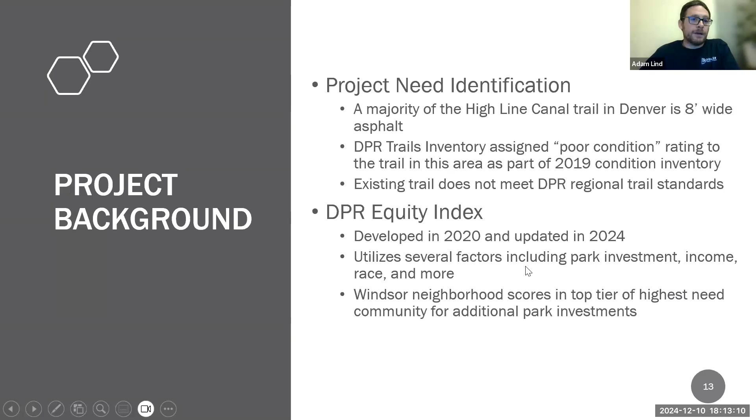Additionally, DPR developed an equity index in 2020 and has been updating it every 2 years. And this utilizes several factors, including park investment, income, and other socioeconomic factors to kind of rate every neighborhood in Denver. And Windsor neighborhood scores in the top tier as the highest need for additional park investments.

So just to familiarize everybody with our limits, if you're not familiar, on the west side is the Parker and Mississippi intersection. If you're a trail user, that's where the new underpass was recently completed. And then on the east side is Havana Street, which is also the border with Aurora.

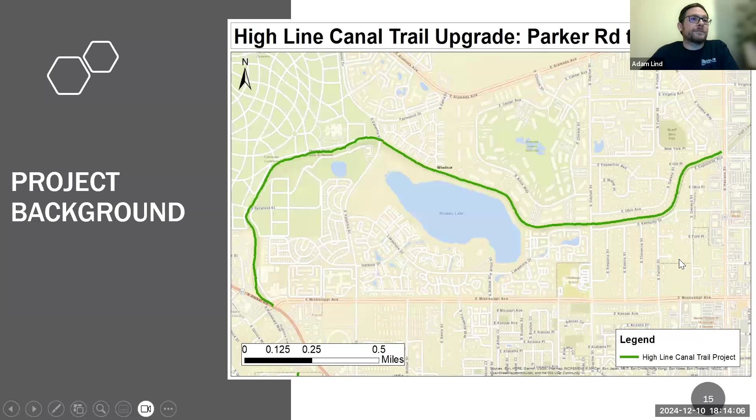So for this project, we've got $4 million for design and construction, a little bit more than a 50-50 split with the High Line Canal Conservancy, 1.7 million coming from them, which also includes funding from a GoCo grant that they recently got, if you heard that in the news, and then 2.3 million from Denver Parks and Rec, between CIP and expansion funds.

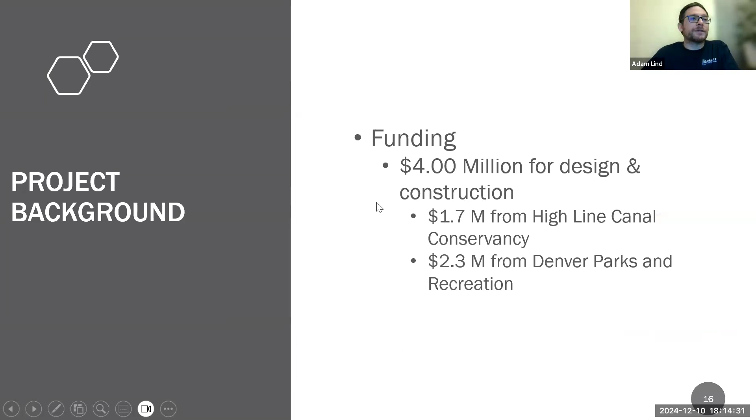So to talk about those proposed improvements, again, here on the left is the existing condition, and on the right is our regional trail standard. So that is a 12-foot concrete trail with an adjacent 4-foot crusher fine trail, and then recoverable shoulders so that you're not kind of just stepping off into a steep slope.

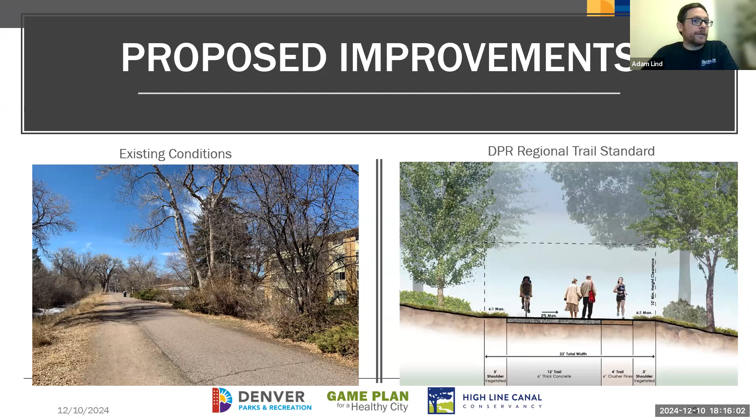So this was developed as part of Denver Moves Peds and Trails, which is a city adopted plan. So this is kind of what we're doing on our regional trails, which is the High Line, Sand Creek, Bear Creek, Cherry Creek, and South Platte. They all kind of are planned to meet this regional trail standard.

However, the High Line Canal plan had a little bit of a different recommendation. And this is looking corridor wide. So even in less developed areas or less populated areas, an 8 to 10 foot hard surface trail with a 6 to 8 foot soft surface trail.

And so working with the Conservancy and their needs and what they've heard from the community, we've come up with a hybrid trail cross section that keeps 12 feet of concrete for ADA compliance and use, and also to give additional space for people biking to pass and not have to pass so closely, but also includes that 6-foot crusher fine trail for that natural environment that everybody enjoys.

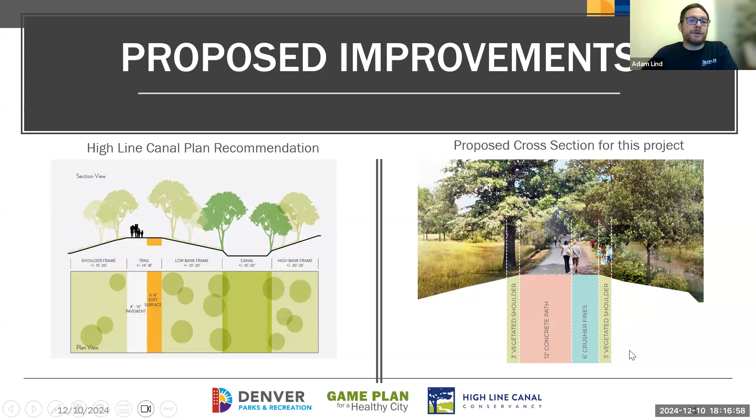So this is our typical that we're kind of aiming for, and we'll talk about some examples where we just don't have this much space and how we made some decisions around that. So again, this picture on the left is the existing conditions, and on the right would be what we would do ideally. So we'd have a really wide concrete trail, that 6-foot crusher fines trail, and some shoulders.

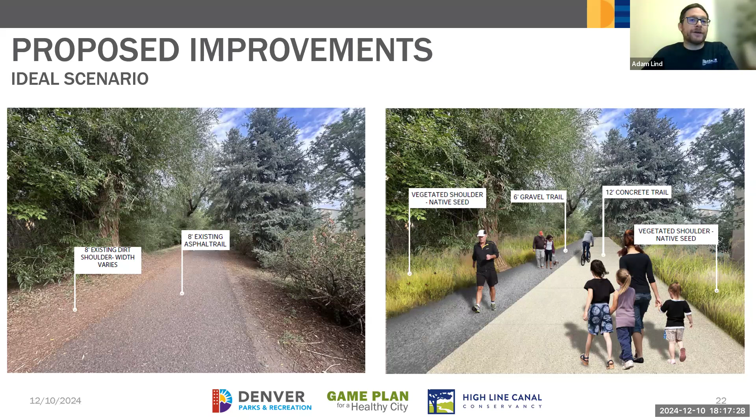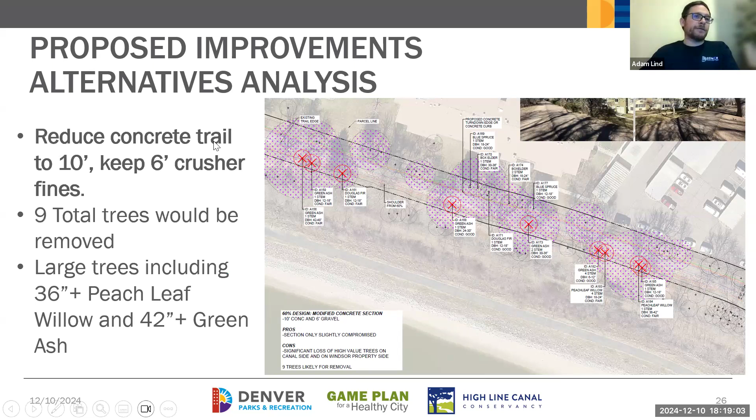So the next iteration we did was, all right, well, let's narrow that concrete trail to 10 feet and keep the 6-foot crusher fines. But even by doing that, we would still be removing 9 trees. So save 1 tree, and both of those large trees have to come out.

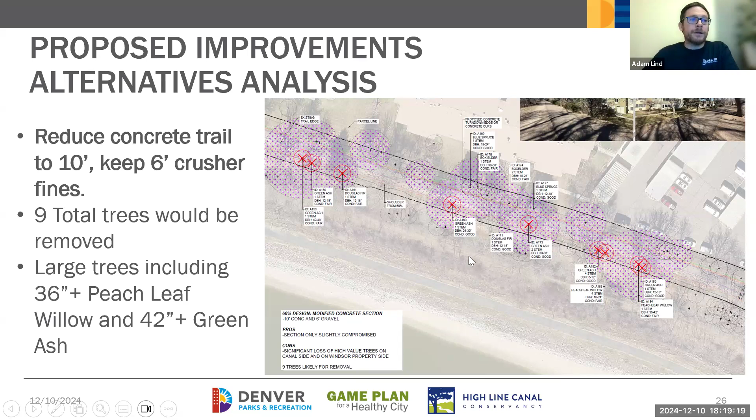So the next iteration was, okay, let's keep the concrete trail at 12 feet, because going back at some point in the future and adding 2 feet of concrete is not really a realistic solution and would be more impactful, and just reducing, and in this case actually eliminating, the crusher fines trail through this section.

So by doing that, keeping the 12-foot concrete trail, it's ADA compliant, the most space for people biking to be able to use the path and get around people walking safely and not have to be so close together. We actually don't need to remove any trees in this section. So, for us, that seems like the most logical option. Over time, as trees die or need to be removed, we can go back and much more easily add in a crusher fine section than we could a concrete section.

So this was a little bit of the decision-making process, how the sausage is made through this project. And there were a few areas where we were really trying to avoid removing any large trees and sometimes had to sacrifice a little bit of crusher fine width, a little bit of concrete trail. So it's not just one straight cross-section throughout the entire project.

So how does this look if you're not? Adam, before we proceed, just a point of clarification. Crusher fine is something that you mentioned several times. What exactly is crusher fine? What type of material is it? That way people are very much aware. Yeah, sure. So it's a soft surface gravel path. So not paved, unpaved, soft surface for walking, running.

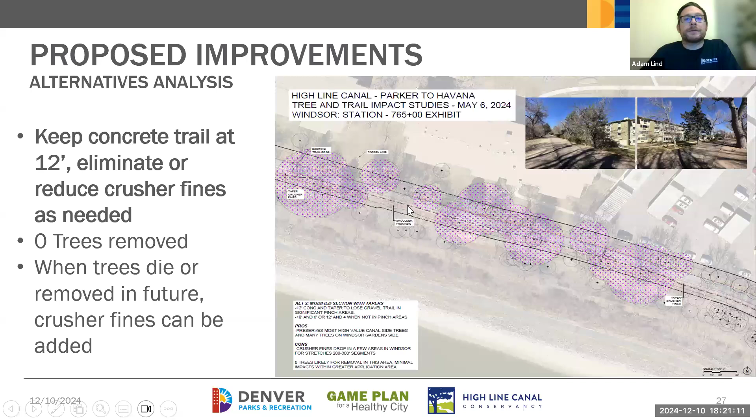Thanks, Jesus. So this is kind of what that looks like in the real world if you're a visual learner and not so much into reading engineering plans. As this gravel path approaches a large tree, it'll kind of neck down, and then we'll start back up once we have clearance out of that tree zone. So there will be a little bit of pinching, but we'll make sure that happens before that pinch point so that you'll have time to stop and look over your shoulder and really make that decision before the trail gets a little bit narrower through here.

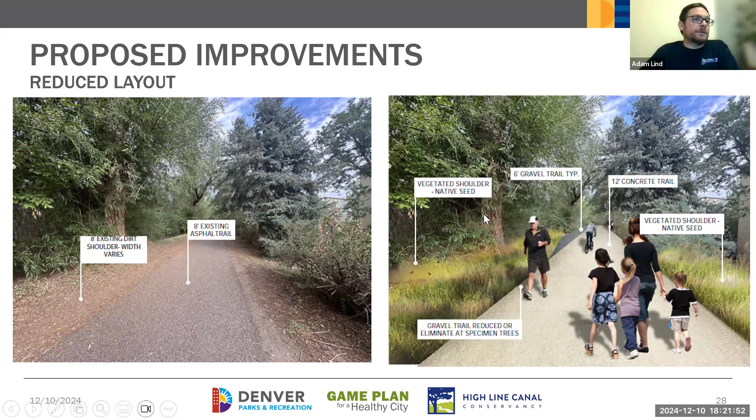So again, a similar graphic for this example. You've got the 12-foot concrete trail and the 6-foot gravel path. Starting here, as we get closer, here's your really large tree that we're trying to preserve. That gravel path will start to taper, and additionally, we're bending out the concrete trail and shrinking it a little bit so that we're pushing away from the trunk of that large tree, giving those roots some more room to breathe. And then as we pass that tree, we'll pick up the gravel trail and start widening that back out.

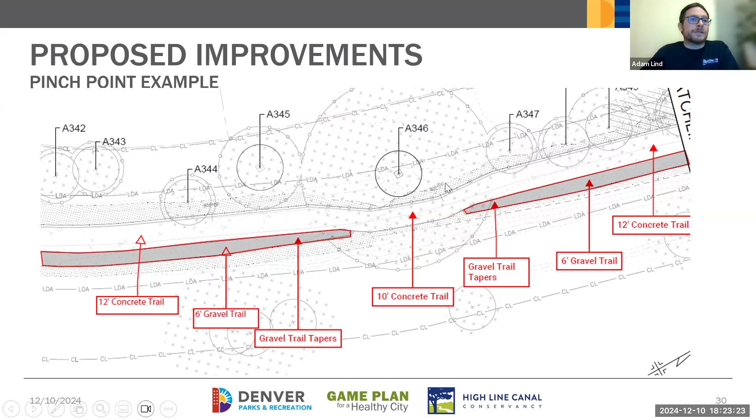So this is, I think, another good visualization of how we're able to get as much of the section in as we can, but sometimes we have to make those changes to that cross section to help preserve large trees, which we think have larger value and benefit for the ecosystem and for people experiencing the trail. We really want to keep that nature in the city vibe that the High Line Canal brings.

Something else that's really new and cool for this project. There's obviously a ton of existing trees along the High Line Canal, but we haven't done any new tree plantings, so that's something that we are going to do here. This is Valencia Street. In addition, we're planning to add new irrigation to water new trees. We know the large trees are going to slowly die over time. We want to start to bring back a new forest canopy through this area to continue to provide shade and a good experience for people using the trails.

So with the tree plantings, we're also looking at kind of making this an amenity zone, an amenity corridor. So we've got some bike racks, picnic tables. We'll have a drinking fountain station.

I'm from North Carolina, and I always say water fountain, and people are like, why are you going to have a big fountain shooting water out? But I mean drinking station.

So something that looks like this here. We'll have some boulder seating as well, stump seating for that more natural feel, but also your typical bench seating. And that'll be interspersed for a few thousand feet west of Valencia. So we're really excited about this. This is something new for the High Line that we're doing in this area, and really trying to add these

amenities that people want. We all know it's getting hotter, and with trees kind of that shade factor going down, we want to be able to provide new shade, water, amenities, rest places that people can enjoy the area, whether you're biking 20 miles or just walking a half a mile. And additionally, as we mentioned earlier on, signage will be added at all these intersections to help let you know where you are on the canal. And interpretive signage is another item we're going to add as well.

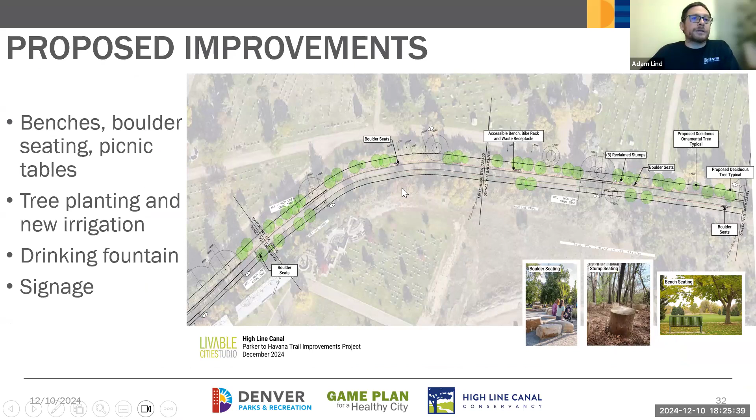So here you can see where this runs along Fairmount Cemetery on the north side. And then we'll run this irrigation and tree planting down through the corridor. So this is something new that should be a good and welcome change for the long-term health and benefit of the canal.

So additionally, all of our trail improvements will be made to meet ADA requirements. All of the crossings will have curb ramps. Since we're widening the trail, we have to widen the curb ramps. The RRFBs, the blinky lights where you can push the button across the street, will be put back and reset. So none of those are going to go away. So really enhancing that corridor and making sure that the trail is comfortable to use for people of all ages and abilities.

So there are going to be some detours with this project. As we hire a construction contractor, we'll work through these details with them, but our initial proposal is that the project will be built in phases. So we'll just call it phase A, from Parker and Mississippi to Valencia Street. The segment of the trail that'll be closed will be pretty much from the underpass ramp to Valencia. It's about 0.8 miles. And so the detour route will use the existing wide sidewalk path on Mississippi.

And then if you're a pedestrian, you can use the sidewalk along Valencia. And if you're a bicyclist, you can use the buffered bike lanes to get through there. And all the detour routes will be signed, and the contractor will be responsible for plowing the streets, the bike lanes, if they're not gotten to by DOTI, and the sidewalks as well. So those won't necessarily fall on the property owners. Those will fall on the contractor during the construction phase because that's part of the detour.

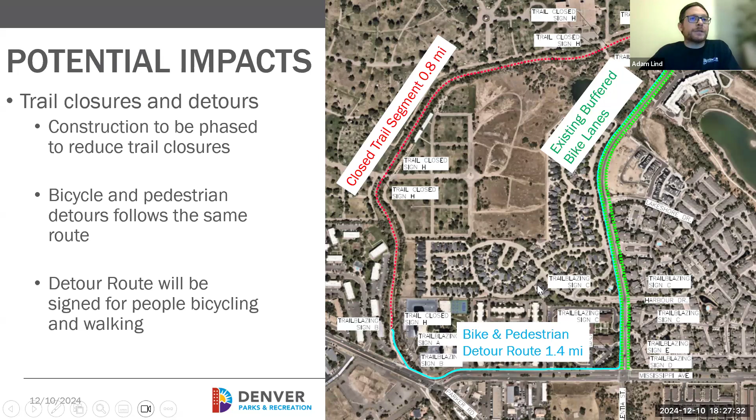the ability to have temporary bike lanes for people biking. If you're walking, you'll be able to use those sidewalks regardless. So we are looking at that and what that feasibility is. So this is a place, again, where the bike route and the pedestrian route are more or less the same. And then the third section is from Dayton to Havana.

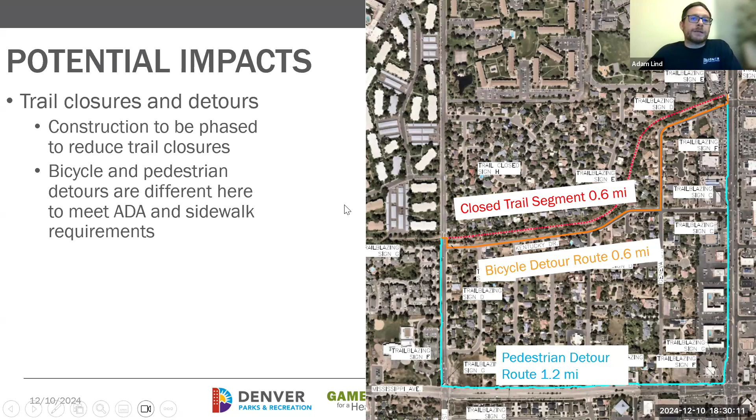Additionally, impacts to trees. As you all are probably familiar, there are a lot of trees adjacent to the trail and in this area. So the city with the High Line Canal Conservancy recently completed a tree risk assessment in July 2022 that helps guide these decisions for tree removal prior to and during the project. The contractor will be responsible for doing handwork around roots and exploratory air spading to locate roots prior to doing construction. And specific additional care will be taken during design and construction to protect these high value trees.

And the forestry department has a pretty strict tree protection zone requirement. So that'll be implemented, and we'll be sure to be on top of that with our contractor. So as of now, this project is proposed to remove 15 trees, with 5 of those being invasive Russian olives that we're more or less required to remove because they're an invasive species.

I do want to note that the High Line Canal Conservancy and Denver Water are also going to be removing more than 20 trees in this same area as part of this risk assessment. So these are high hazard trees that are dead or failing and are prone at any point to get blown over during a storm or have their limbs break and crash on the trail. So there'll be some additional removals that are separate from and independent of this project's requirements. And those should be starting, I think, next month if they haven't started yet.

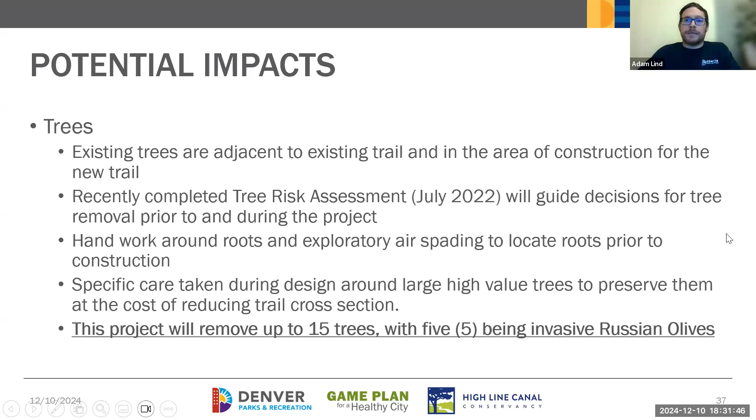So again, looking at the tree protection zone, it's 1 foot of protection for every 1 inch of tree diameter. When it hits the asphalt trail, that's also a line where the tree protection zone stops, since in theory there's 6 inches of asphalt there, and that's directing roots away. But a lot of this work is going to be in the tree protection zone, so a lot of hand digging will occur for that construction, and it'll probably make the construction take a little bit longer than if we were just pouring concrete in a wide open field.

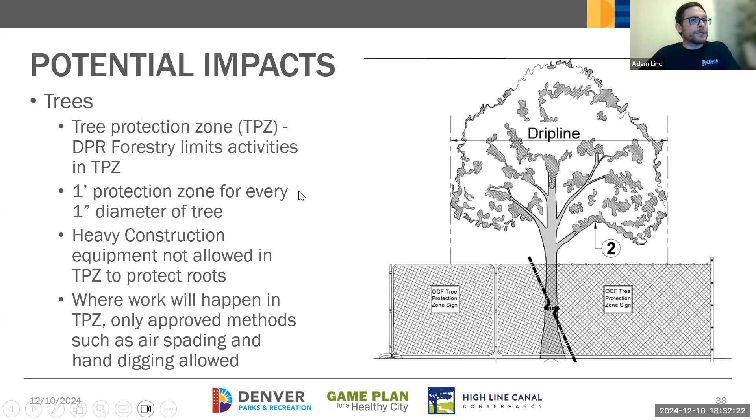So in addition to the tree planting that we talked about around Valencia, that's going to plant around 80 new trees in the current design. There'll be native seeding adjacent to the trail, so where maybe it looks weedy or undeveloped, we'll be having new vegetation grown. And also in front of the Windsor Gardens, there's a variety of existing shrubs and other vegetation that will be coming out in certain sections, and we'll be planting that back in and have been working with the groundskeeper there to develop a plan to take care of that new vegetation and help make sure it establishes.

So in terms of project timeline, we started this project back in 2022. It's taken us a little bit longer than desired to get here, but we've made it and we're getting close to construction. So we're at 100% design public outreach here. So we're taking any final comments and really making sure that we're keeping the public informed as we finalize design in the next month or two. And then we'll go through our construction procurement, and ideally construction will start in spring of '25.

And like I mentioned, if we were doing this in an open field, we'd have a really good handle on how quickly construction would occur and how easy it could be. But with all the heavily treed areas and roots, there's a little bit of variability. So once we get a contractor for construction on board, we'll have a schedule and we'll be able to share that information out as well. And there'll be some additional public outreach during the construction phase as we move from section to section, so everybody's aware of what's coming, when that work's going to occur, and when those detours are going to happen.

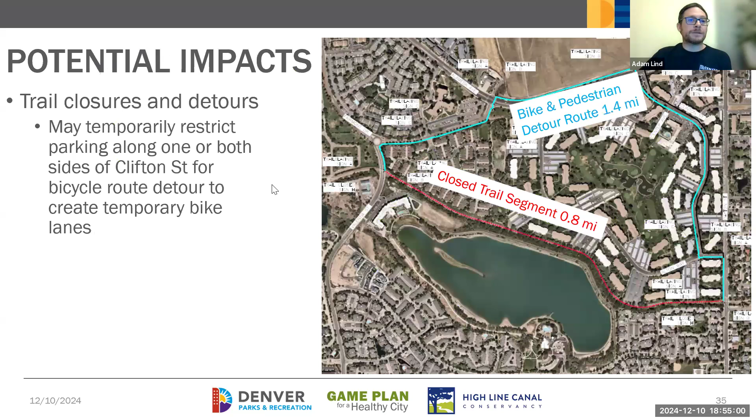With all the tree plantings, you wouldn't be able to drive back here. We've got other amenities in the zone, so we're really making sure that this point will no longer be accessible for vehicles as we widen that trail and improve it. So hopefully that'll help resolve some of the issues that are ongoing today, but we'll definitely let the rangers know about possible other illegal vehicle use going on out here.

And Adam, if I can just add to that, the city has been working with Fairmont Cemetery on some of those safety and security issues. One of the things that Fairmont is going to do, and they're a private property owner, so they can do what they want, is to close off that access. Some of the residents are very upset about that because it is a really nice amenity for them to be able to walk in and access the cemetery in that way. Unfortunately, this is one of those situations where we just can't make everybody happy, and we've got to err on the side of community safety. And so they are going to close off that access.